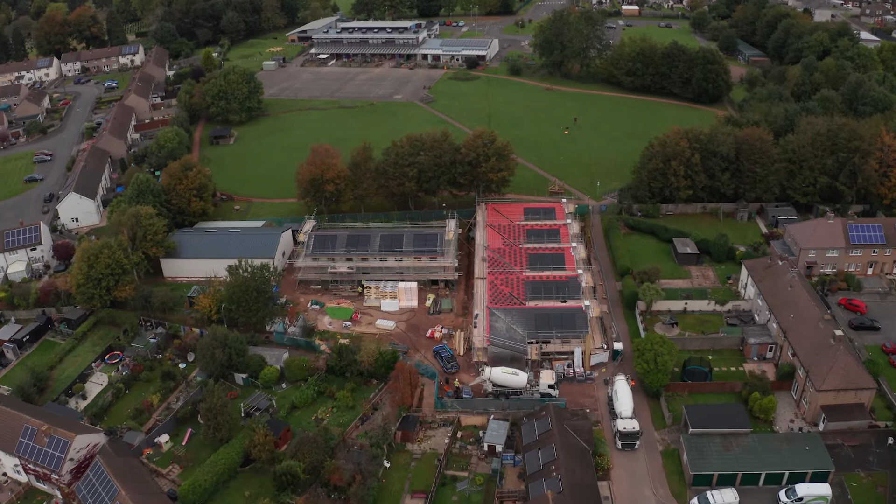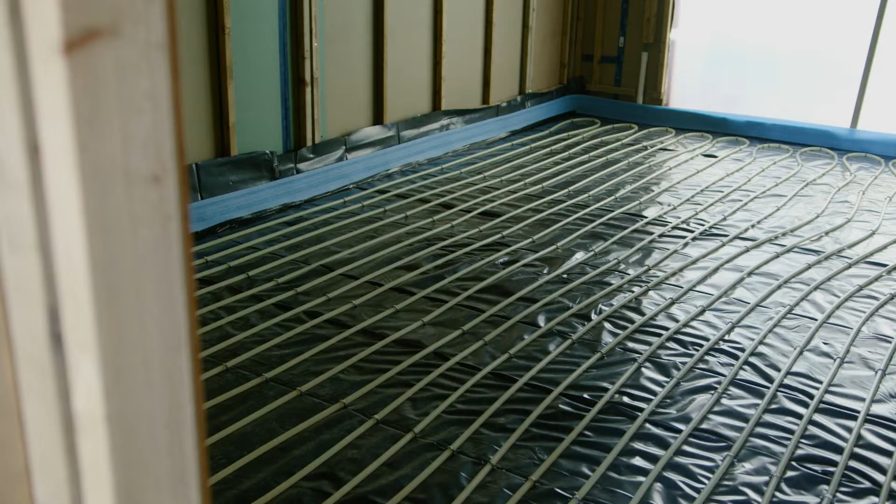Today I'm here in Chepstow where Monmouthshire Housing Association are building 11 homes and a scout hut at one of their sites on Pembroke Road. All these properties feature Daikin products including Daikin monoblock air source heat pumps and underfloor heating equipment to provide space heating and domestic hot water.

Underfloor heating has several advantages. Firstly, it's highly energy efficient as the required leaving water temperature is much lower compared with other types of heat emitters. It's also wonderfully comfortable as the heat is produced uniformly throughout the space and distributed upwards from the bottom of the room, so the floor is warm underfoot.

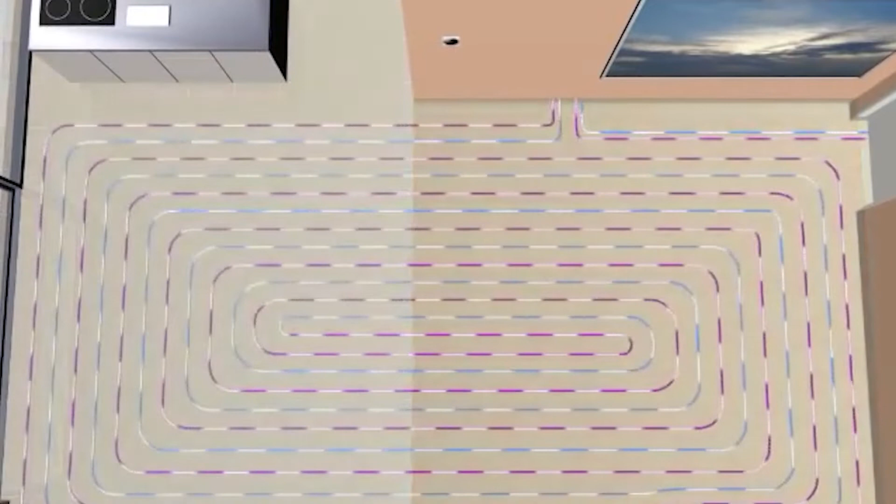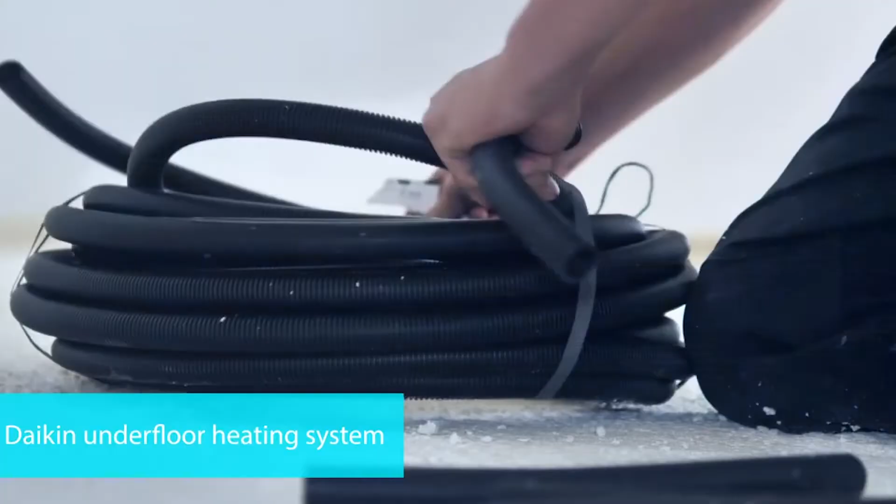Underfloor heating is also completely quiet and space-saving, as it avoids the need for radiators or fan coils, so it's aesthetically pleasing. We produce a wide range of underfloor heating products, which include underfloor heating pipes, designed for both low and high temperature hot water, manifolds, actuators, floor panels, and underfloor heating controls and thermostats.

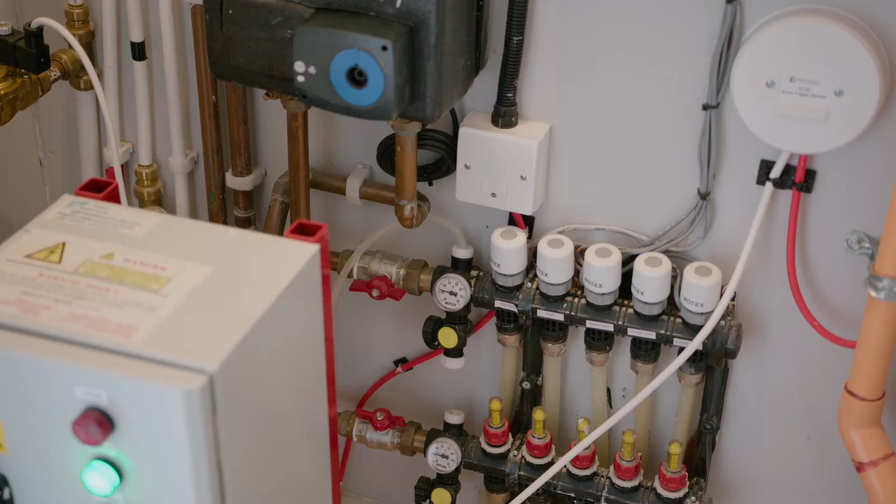Let's now visit a finished property where Daikin underfloor heating equipment is installed and is being used for space heating. Here we are in Caldicot in front of a new build property where Daikin underfloor heating is installed. I'm absolutely convinced that underfloor heating will play an important part in the future of heating. But before we look ahead, let me tell you a bit about the history of underfloor heating, which revolutionized indoor comfort as far back as 7,000 years ago.

The first underfloor heating system is thought to have been invented in 5000 BC in the region now known as North Korea. The inhabitants of this area discovered the benefits of heating or baking the floor in the home. This phenomenon was then named ondol, which means warm stone. This warm stone design was thought to have been combined with the cooking oven to both cook food as well as heat the space.

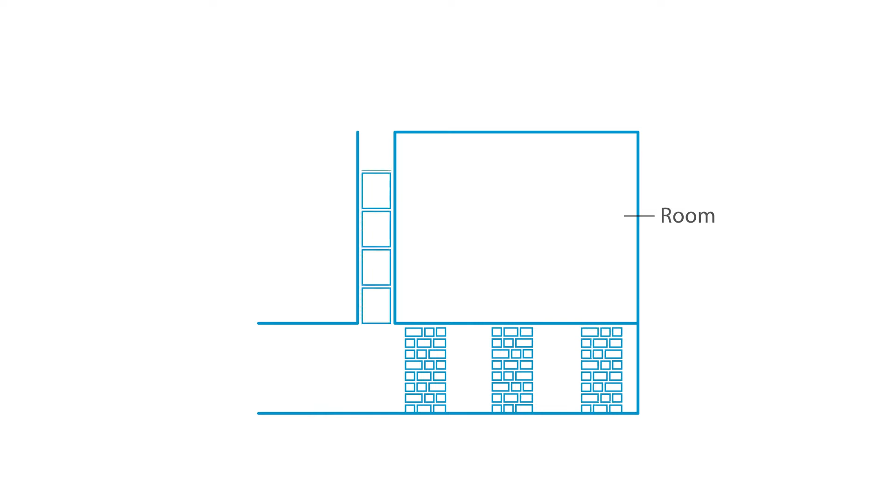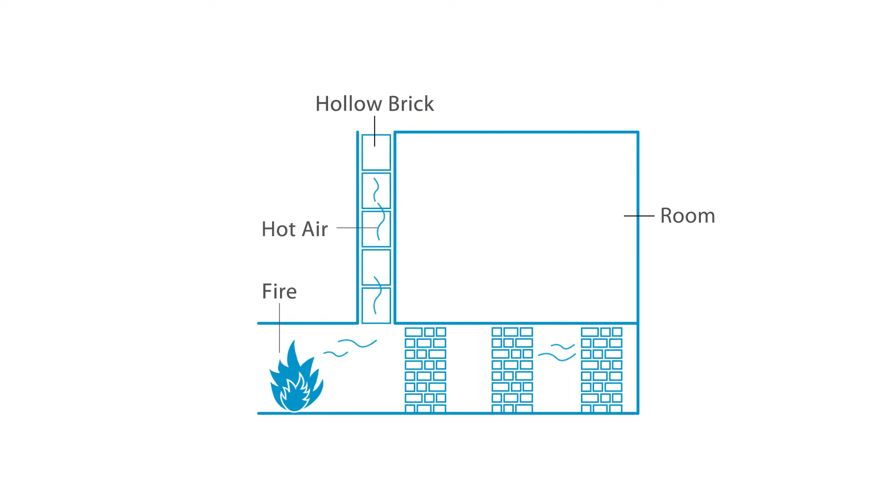Underfloor heating was refined further by ancient Romans in 500 BC with what is known as hypocaust. This system consisted of hollow chambers constructed between the ground and the bottom of the rooms to be heated. Fires were lit in the hollow chambers, and the hot air rising from these fires would flow through the chambers and heat up the rooms above.

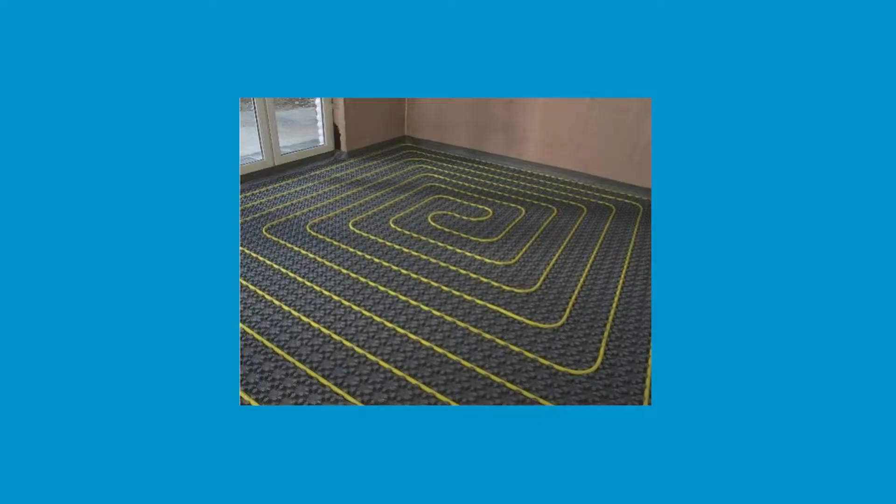Underfloor heating today is of course much more advanced and is designed with piping circuits for hot water, together with plates, collectors or manifolds, actuators and advanced controls to ensure the ultimate in comfort. With modern underfloor heating, the pipes are installed on a concrete slab under the flooring. Hot water runs through these pipes and the heat emitted warms the rooms above. The water is normally heated by a heat generator, such as a boiler, or to be more eco-friendly, by an air source heat pump.

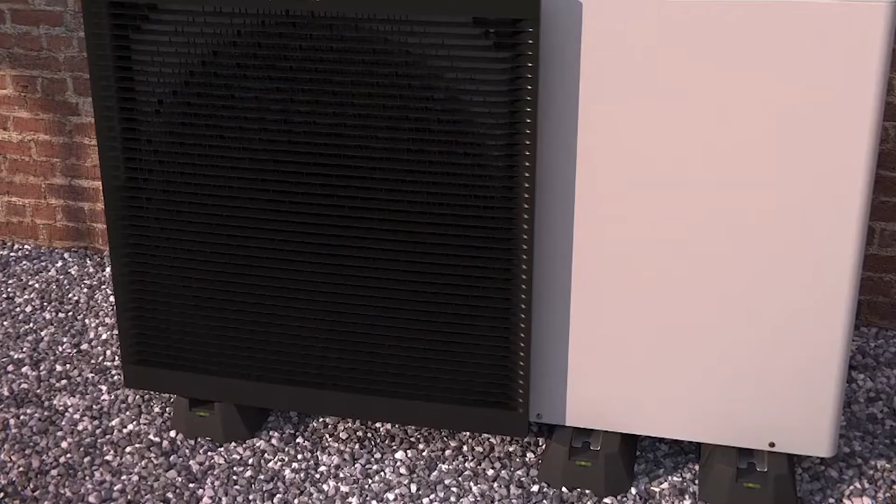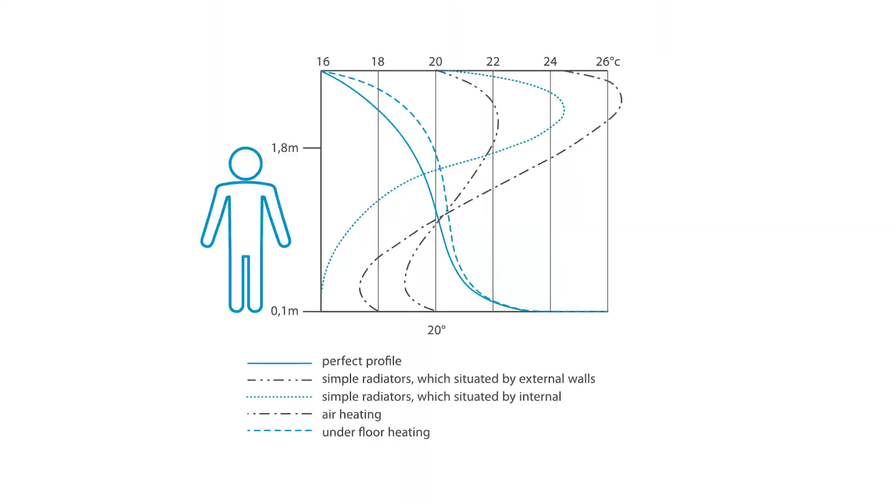So now that I've hopefully convinced you that underfloor heating is a must-have for your next project, let's go to our Woking Technology Centre, where I can show you some of the main products which Daikin offer.

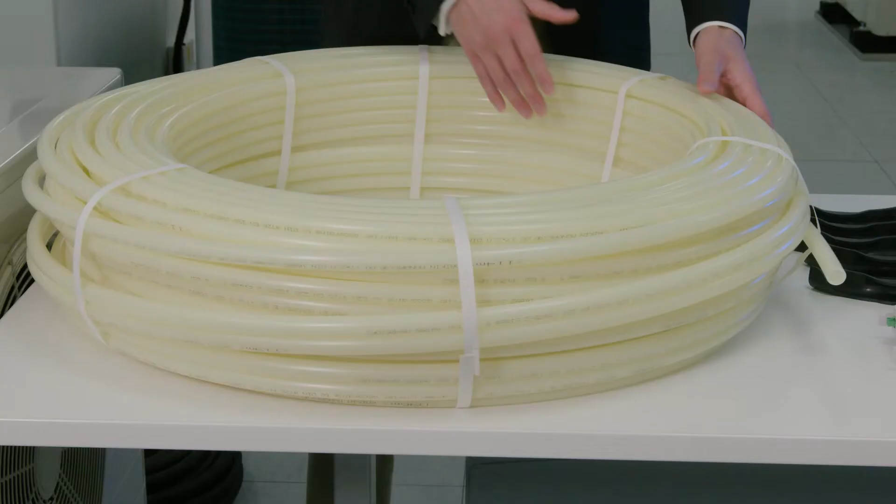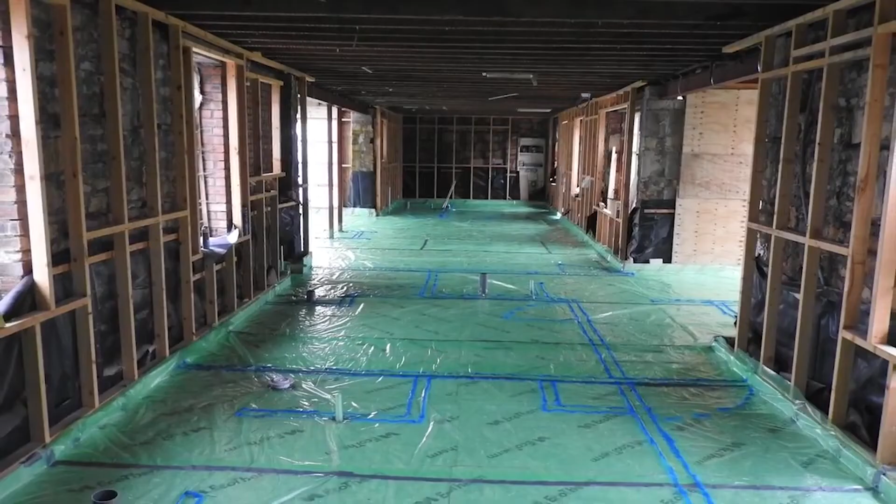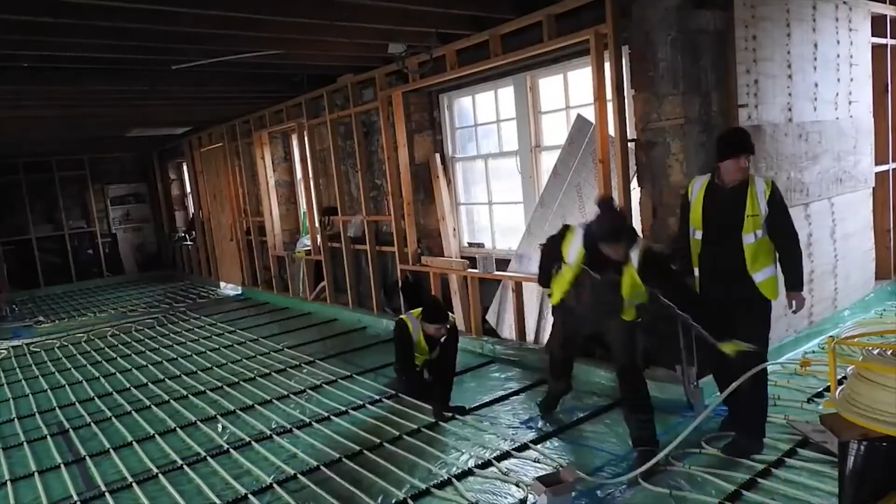The first item to show is our Monopex range of underfloor heating pipes. These pipes are used as heat emitters, so they carry hot water from the source and then transfer the heat from the water into the space. The pipes come in different sizes. The most common are 14, 17 and 20 millimeter in diameter. To ensure even distribution of heat in the floor when installing these pipes in the room, they are laid out with a set spacing between them, normally 100, 150 or 200 millimeter.

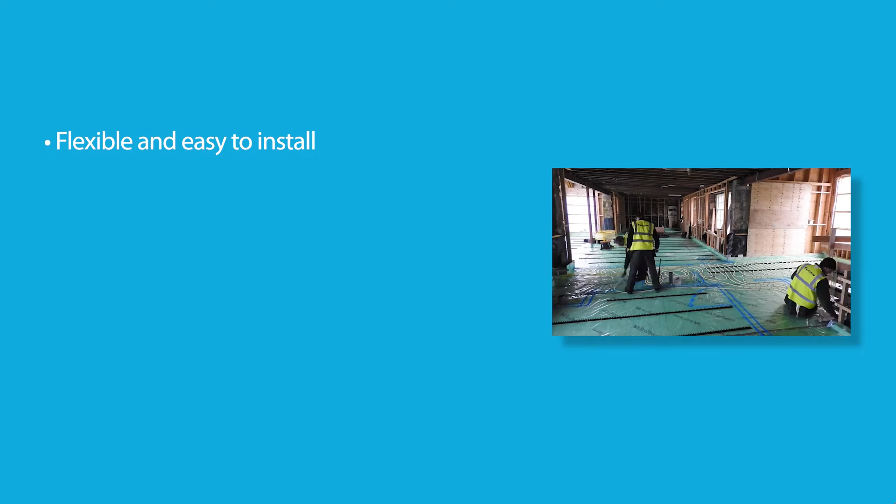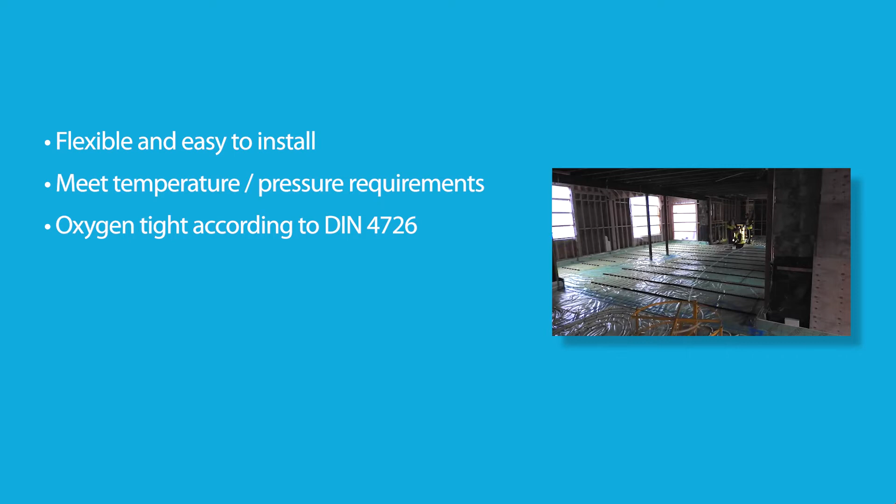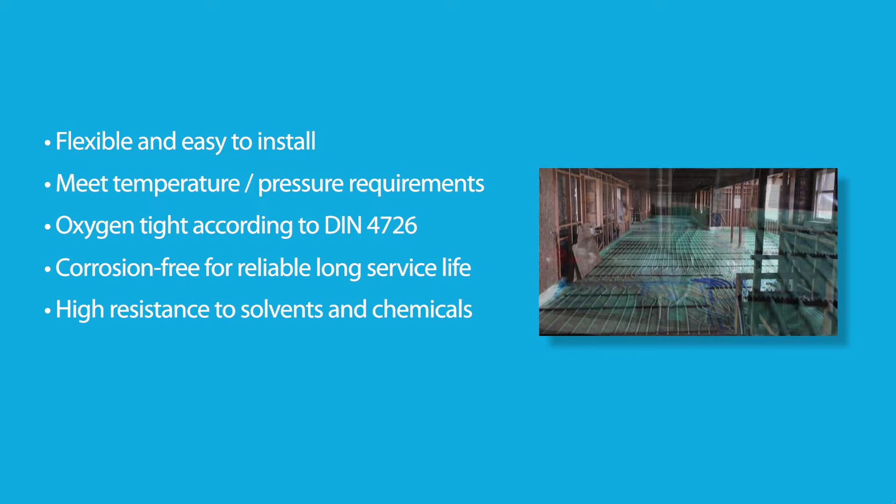For each spacing, a formula is used to calculate the total length of the pipe used for the square meterage of the room. Our design team are happy to help calculate this for you. Our pipes are flexible and easy to install. They meet all temperature and pressure requirements for drinking water and heating applications. They are oxygen tight according to DIN 4726 in heating systems and are corrosion free for reliable long service life. They also have high resistance to both solvents and chemicals and to mechanical impacts in transport and on site.

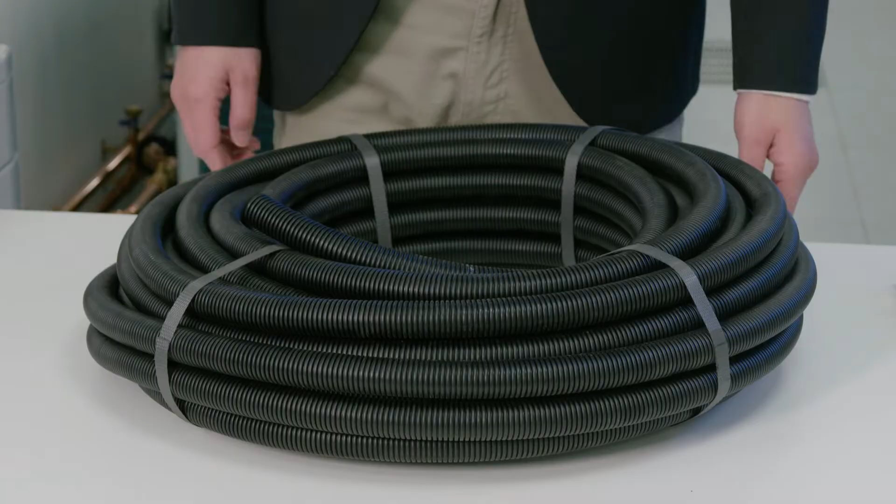Let's also take a look at the protective piping. This is a black corrugated pipe made of plastic, which offers additional insulation in the area of the manifold and expansion joints. Talking of manifold, this is what connects the underfloor heating piping circuits to the heat source and acts as the termination point for the circuits. The manifold circulates the heated water from the heat pump or boiler through the underfloor heating circuits whilst controlling the pressure and the flow rates, and if you're using a mixing unit, controlling the circuit temperature too.

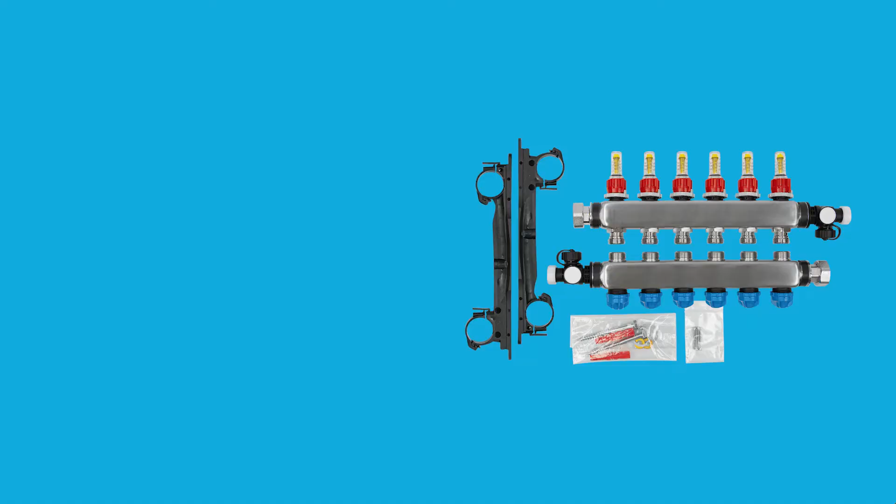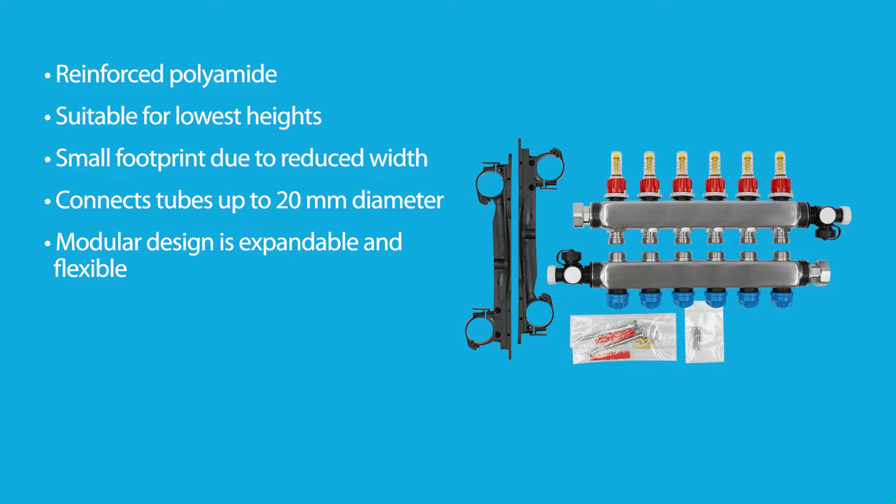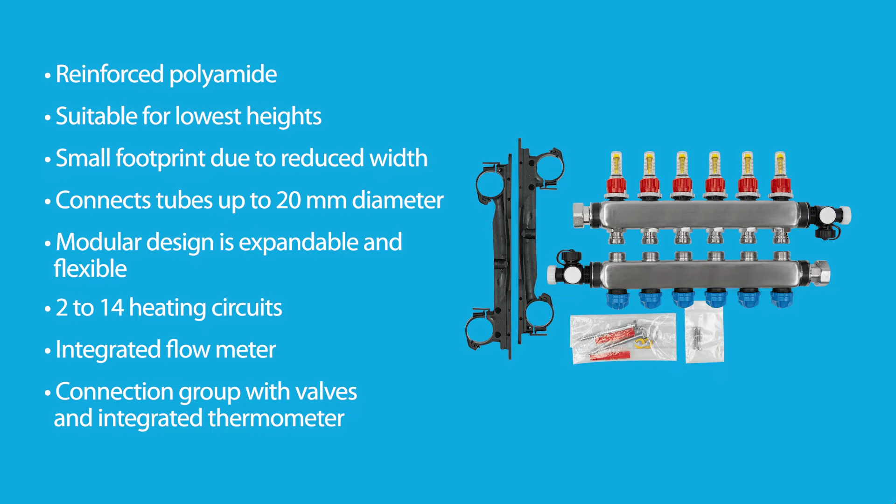Daikin's RMX manifolds can be used for all underfloor heating systems. They are made of reinforced polyamide and suitable for low heights under the floor, with a small footprint thanks to their reduced width. Suitable for connecting tubes of up to 20 mm diameter, they are also modular in design, so very flexible and expandable from 2 to 14 heating circuits. They come with an integrated flow meter, and each connection group has valves and an integrated thermometer.

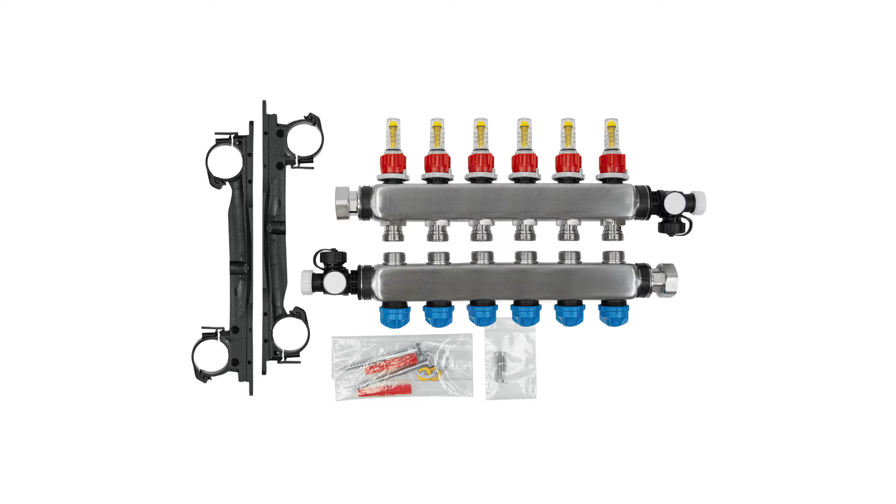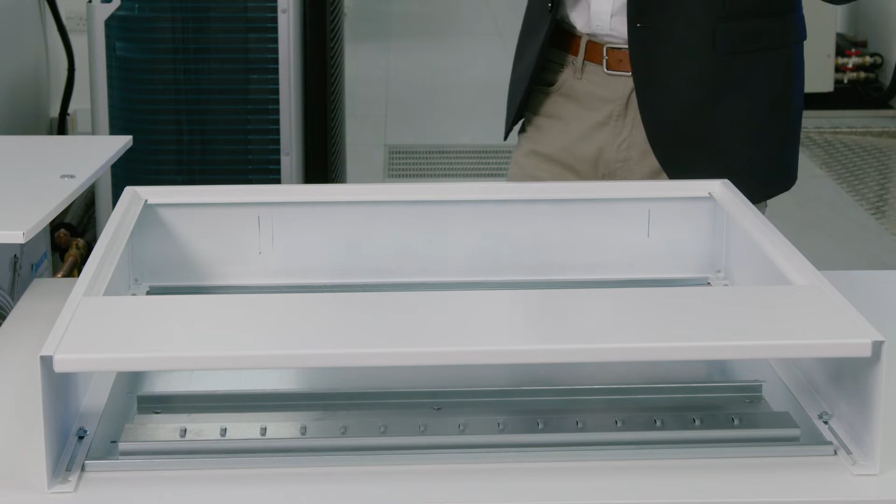In addition to RMX plastic manifolds, we also have RMV stainless steel manifolds. Main connections are 28 mm and branch connections are 22 mm in diameter. The manifolds are installed within a manifold cabinet. Our manifold cabinets come in different sizes and are suitable for the whole range of our manifolds.

Next, we come to Daikin valve actuators. This is a thermoelectric valve drive for opening and closing valves on the heating circuit distributors of concealed floor heating and cooling systems. It has an operating voltage of 230 volt. These actuators work in conjunction with the manifolds to allow and restrict the flow of water into each space. So normally, the actuators would be mounted on the valve pin of the manifold, and at the other end it would be linked to a zone thermostat. After receiving the signal from the thermostat, it will open or close the valve.

Now let's look at some of the fitting practicalities. Here you can see the knobbed plates used to hold the underfloor heating pipes in place. They have a protective layer made of deep-drawn polystyrene, an overlapping connection to ensure an absolutely secure hold for the heating pipe.

This film strip is placed on the underfloor heating panel to prevent screed mortar from penetrating the wall area. The screed is therefore able to float and has the necessary freedom of movement, and at the same time provides soundproofing for the structure of the building.

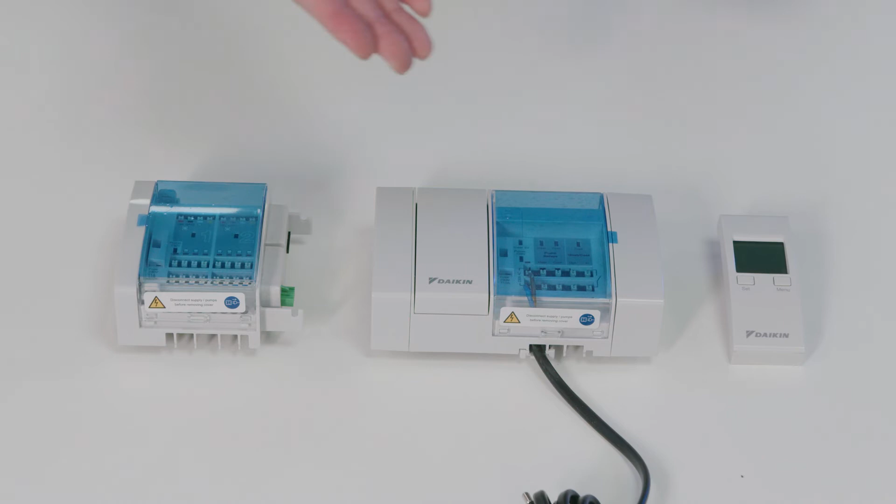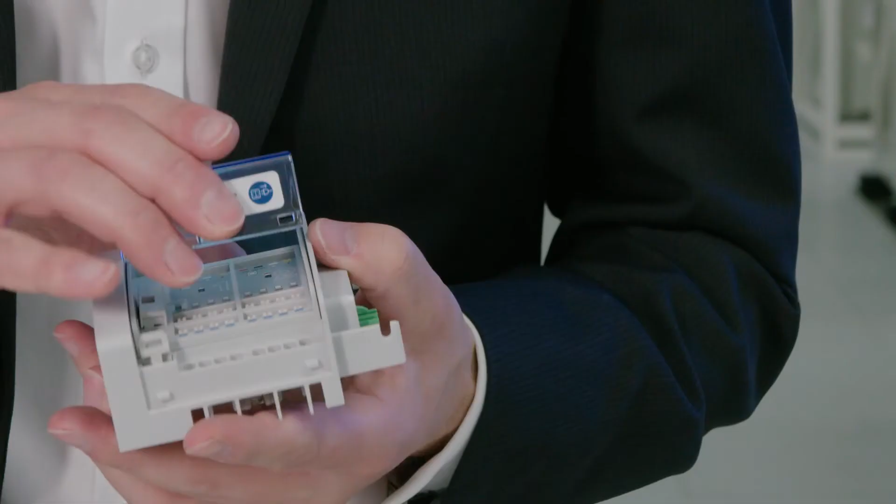Here you can see how a wiring center power module and a wiring center clock module together make an integrated underfloor heating control system which regulates the temperature of the room with underfloor heating. The control system does this by comparing the actual and target temperatures and controlling the flow of hot water via the relevant thermal actuators. The Daikin Underfloor Heating Wiring Center is the central connection unit or a central hub. The wiring center modules each have 2 or 6 independent control circuits and regulate the respective thermal actuators, taking into account all incoming signals of the room controllers and wiring center power module.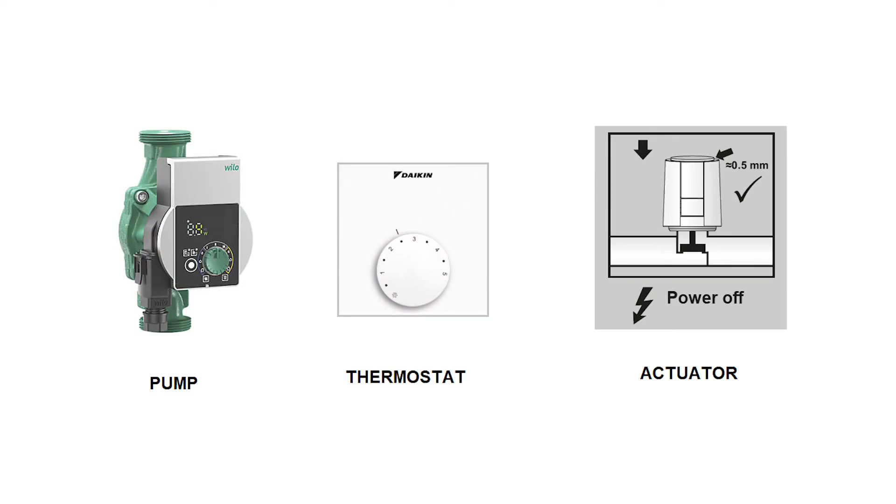The wiring center power module has an integrated power supply for powering thermostats with a small voltage, powering actuators with 230 volt, and can provide possible integration to the time clock. The wiring center power module is also used to control the pumps and to change the mode of the individual room thermostats.

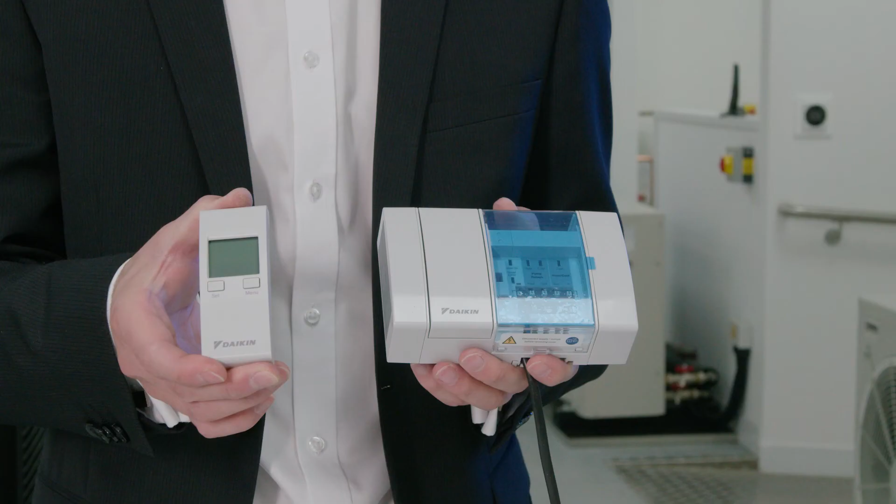The wiring center clock module is used in conjunction with the room thermostats, the wiring center and the power module to set the schedule for the heating regime. The heat pump run-on time can also be set via this module.

And now for the first time, we will introduce an underfloor heating design and selection tool which will help you save time and will give you peace of mind knowing that the design is carried out by a reliable partner. A new toolbox is now available on Heating Solutions Navigator, which will take you to the underfloor heating selection tool. This underfloor heating selection tool consists of quick underfloor heating calculation and detailed underfloor heating calculation options.

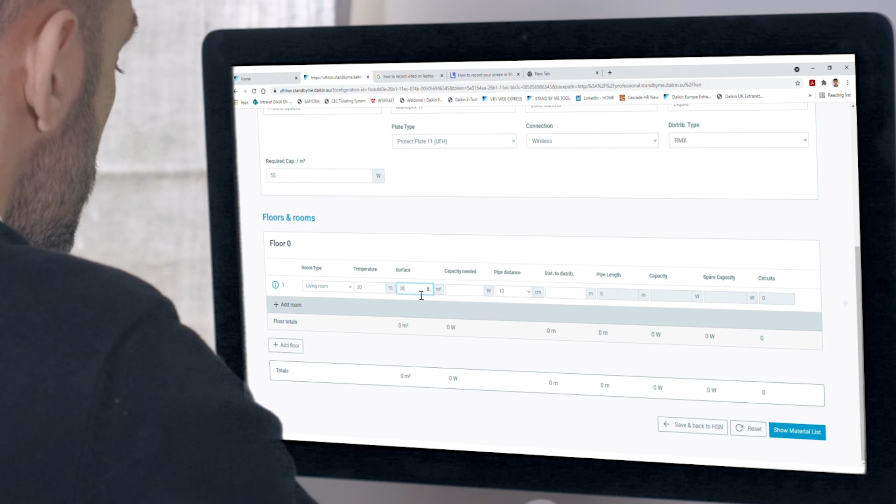The quick calculation option allows you to select the underfloor heating system in a simplified way based on the basic input of the project. The more detailed calculation allows installers to ask Daikin for a detailed underfloor heating plan based on the house plan and to finalise the underfloor heating materials.

Okay, so that's given you a whistle-stop tour of all the options available to you to create an efficient and easily controllable underfloor heating system for your customers.